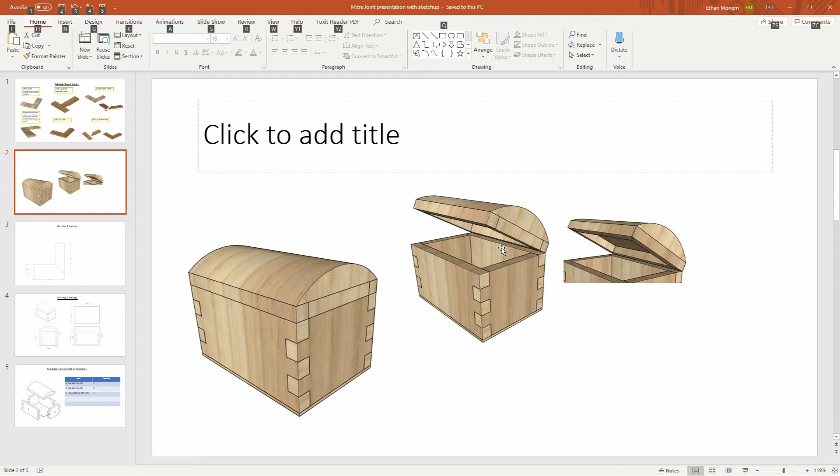I'm just going to show you some simple tricks to do that. You will then, by the end, create a working drawing and an exploded view with a bill of materials.

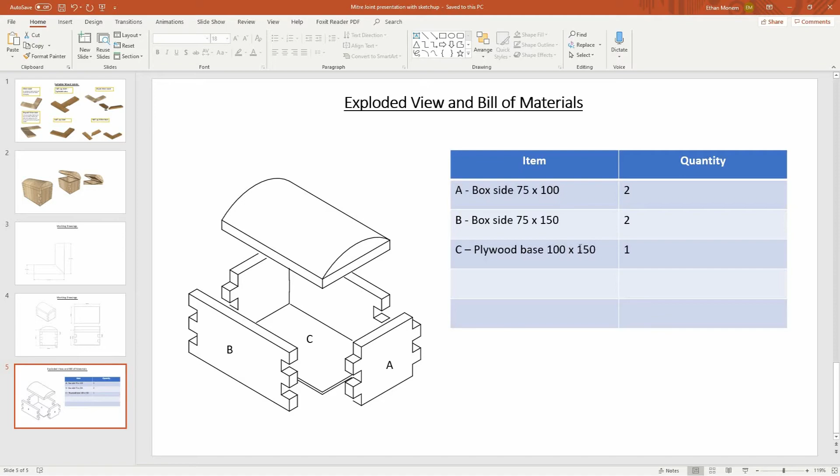You can see already I have got a part of a box that I'm making. It has got finger joints, it's got 4 walls, and what we're going to do is create the rest of this box first. The first thing we're going to do is create the side walls of our box. To draw that out, it's actually more helpful if we change our camera view so we're looking straight down.

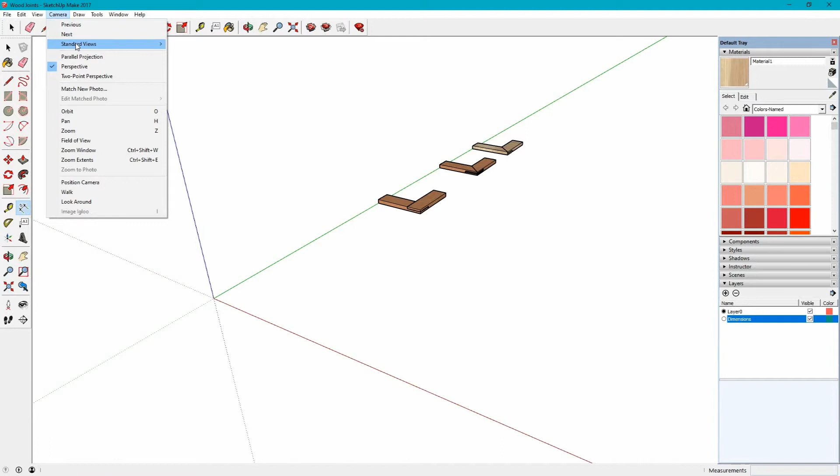The first thing I'm going to do is go to Camera, Standard Views, and click Top. Now you can see that I'm looking straight down onto the green and red axis, so our X and our Y. It might also help if we put it into parallel projection, so we haven't got any perspective going on, so we're looking straight down on top of it.

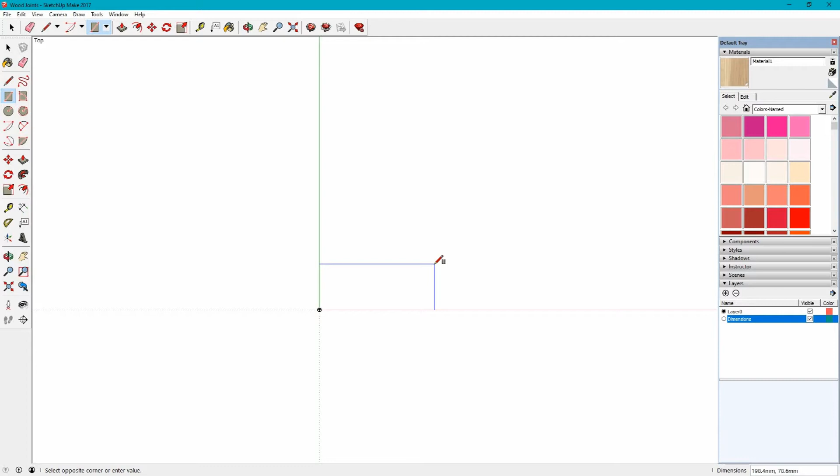Now I'm going to draw a rectangle which is 75 high by 150 wide, because that is the dimensions of our sides. I'm just going to type 150 along, comma, space, 75, as before, press enter, and there we have our rectangle, so I can look straight down onto it.

Now we're going to divide this 75 into 5 equal sections. We're going to divide it into 15mm fingers.

To do that, we're going to use this tape measure tool. I'm also going to come in the same distance as the thickness of our piece of wood. Now, the thickness of our wood is going to be 12mm, so I'm going to come along here, type 12, and make a reference point here, which is 12mm in.

Then I'm going to draw a straight line all the way across, and I'm going to measure along this line.

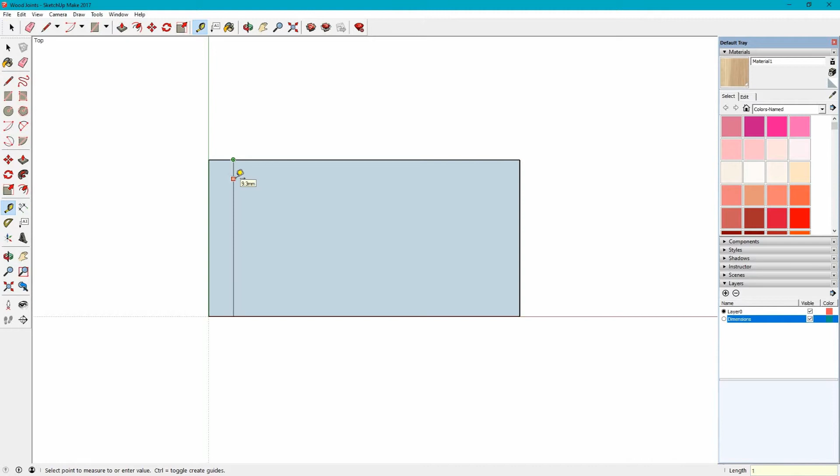Sorry, not 12, 15. 15mm, because that's the width of our finger. And then from that point I'm going to do the same, and then the same again, 15. So I'm just making a number of markers, 15mm along each point.

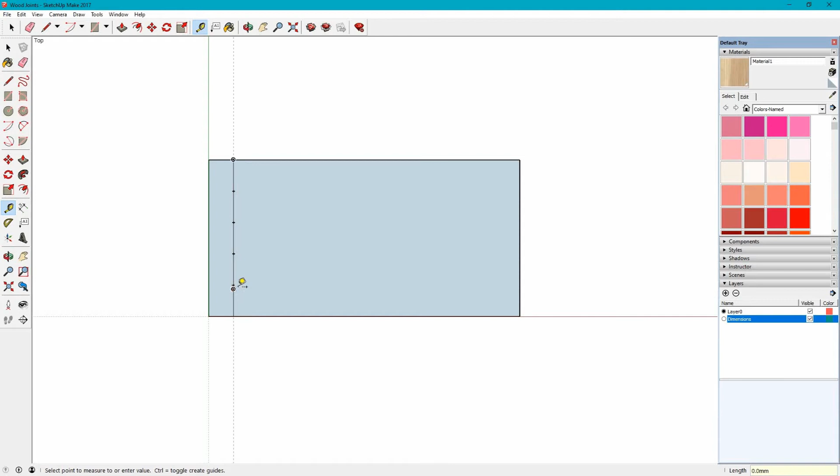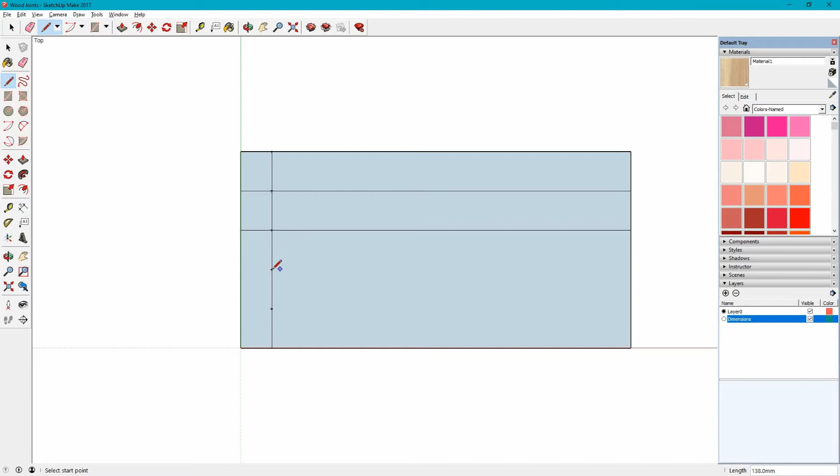Now we want a duplicate on both sides of the finger joints. So where I have marked, the easiest thing would be to draw a line all the way across to the other side, as well as to this side. I'm drawing in where these fingers will go, and then we'll delete off the extra lines afterwards. This is just a quicker way of doing this.

I also need to come in 12mm on this side and draw a straight line down from there to there.

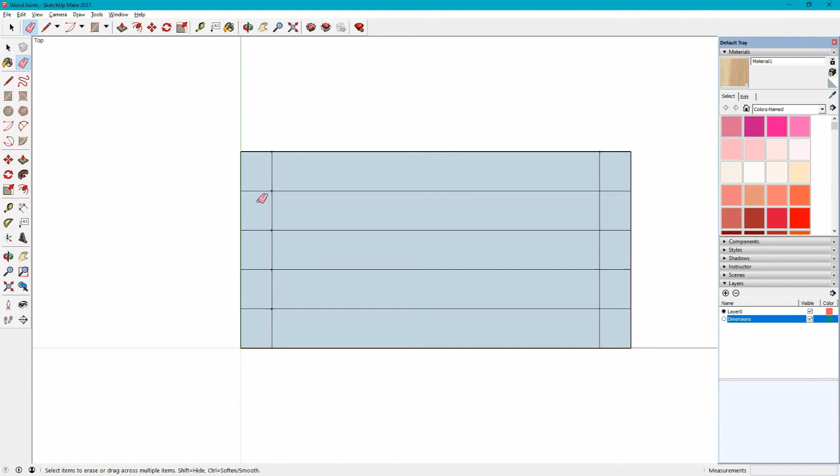What I can do now is keep the first finger and get rid of this one. So using the rubber tool, I'm just going to click and swipe across that line, and the same on that one. Do the same on this side and on this side.

Then I'm going to get rid of these middle lines. So I left click and drag, and you'll see they disappear. Then I want to get rid of these internal lines. You'll still see your guide points, but at this point it doesn't matter. Alright, and that gives us the profile of one of our side walls.

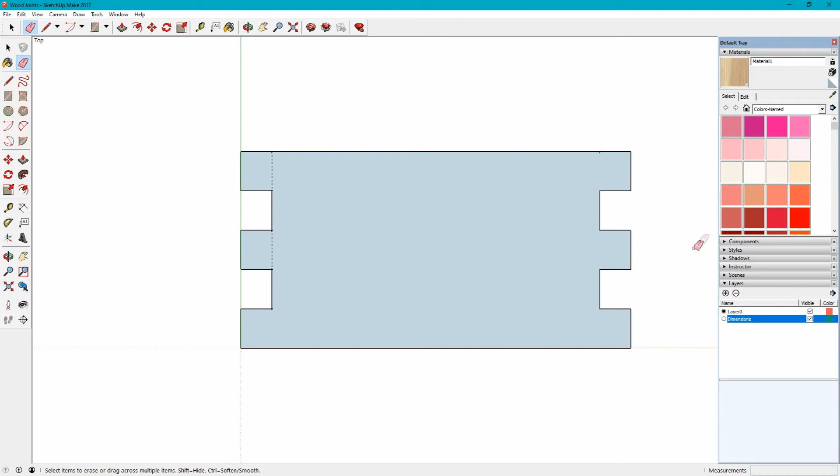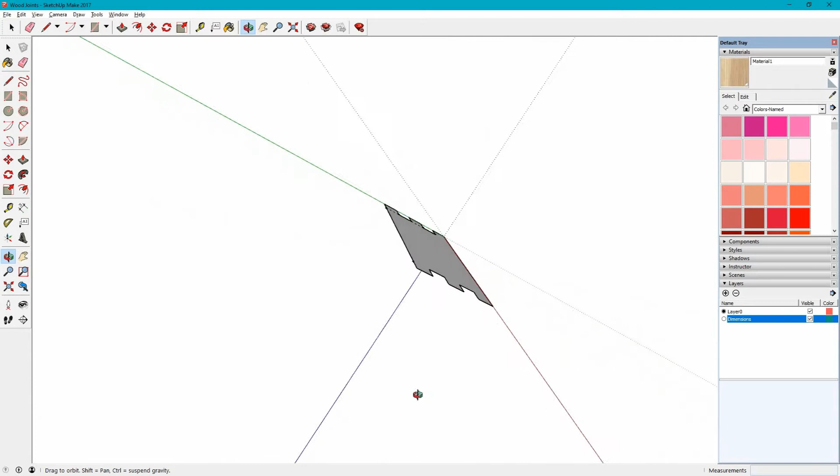Now if I click and hold the mouse wheel and rotate back into 3D. Now I'm going to set this back to perspective, so otherwise it looks distorted, and you can see there we have our sidewall. Now it's flat, so I need to extrude it, so I'm going to use the push-pull tool, hover over the surface, click and drag out, type 12 because that's the thickness, and there we have one sidewall.

Now the opposite sidewall is going to be identical.

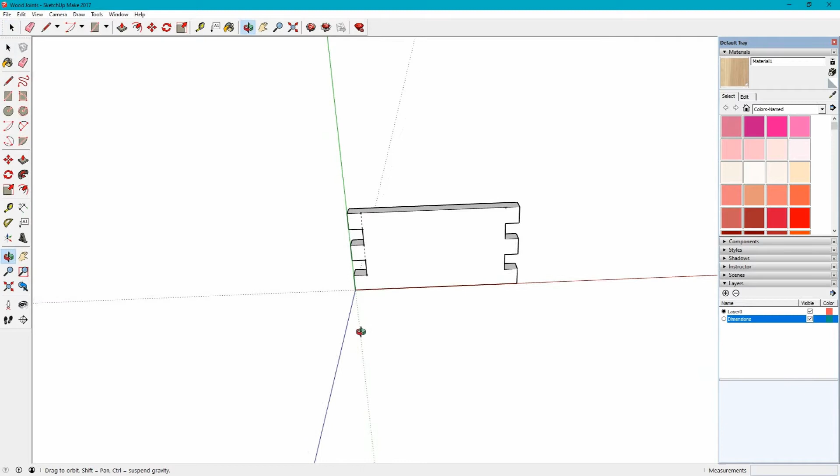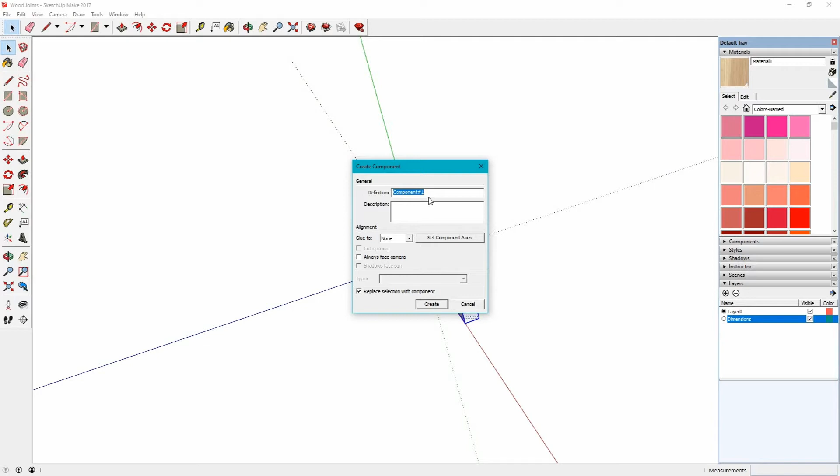So I'm going to first triple click, 1, 2, 3, right click on it. I can make it a component or a group. This time I'm going to make it a component because it is a component in the box, and I'm going to call it sidewall create.

Now, if I want to modify this, then the copy I make, so I'm going to move it and make a copy. Whatever I do to this or this, it will do the same function on all of them. So if I modify one, it modifies all of them. That's something you have to bear in mind, but because I want them to all be the same, that's what I'm going to do.

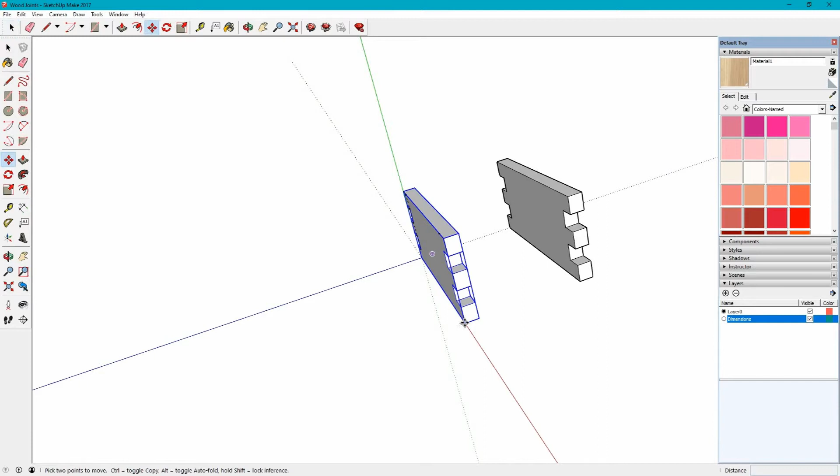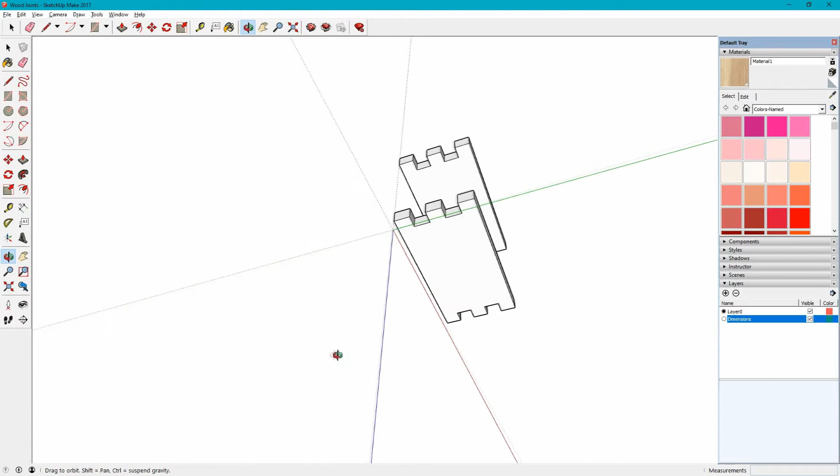Now, if you notice, if I just move this, you'll see that the guides haven't been included in the selection, which is good because we want to get rid of them. We're done with them now. Okay, so there's our two side walls.

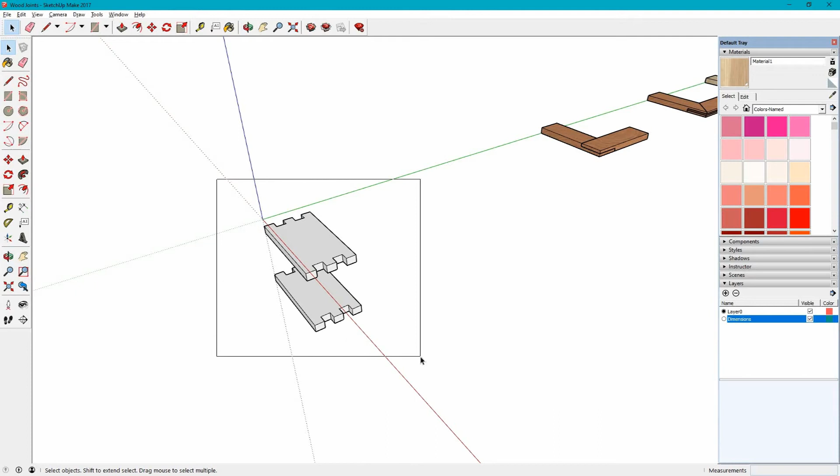Now we're going to do the same for the end. Between here to here, we're going to make our box. As you can see at the moment, I've got these going in the wrong direction. So what I'm going to do is select both of them, and then rotate about the red axis, pulling them through 90 degrees so they're in the right plane.

Okay, now what I'm going to do is move this one so that it is 100 millimeters.

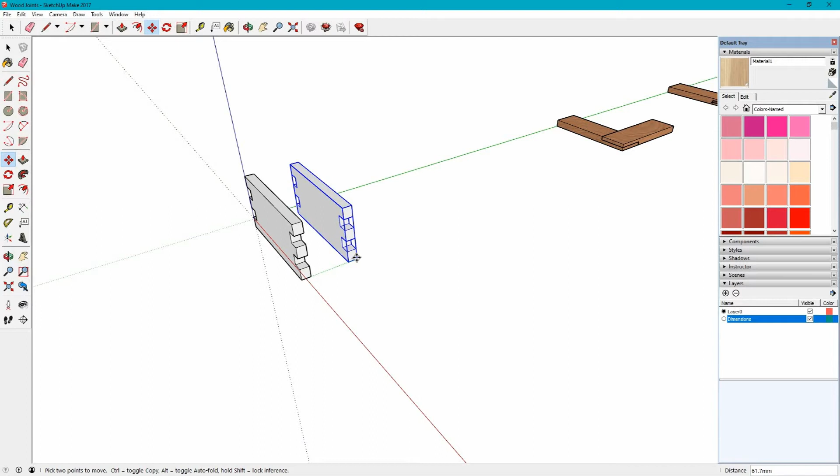I need to move it from this point, and I'm going to move that. No, it's not going to work. I'm going to do this. So I need to move it 100 millimeters minus 12 millimeters because that's the thickness of one wall. So that is 88.

Okay, which means that between here, it should give me 100 by 75, which if you look in the dimensions panel, it does. So that is correct.

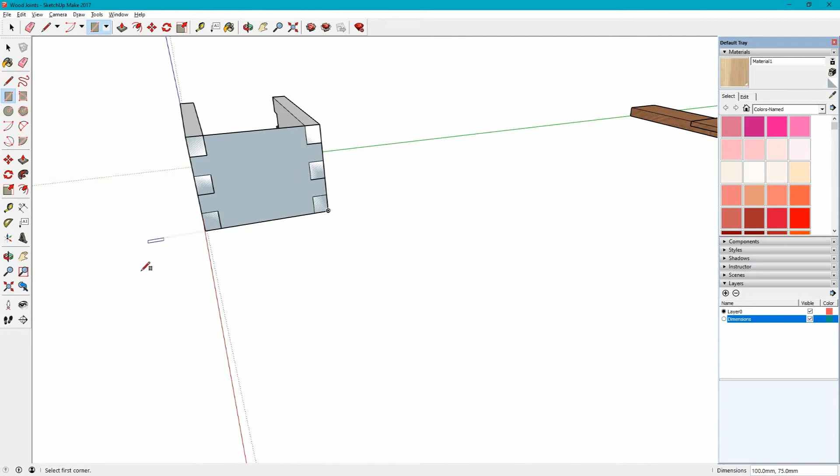Okay, so I'm just going to draw that over the ends. I've got it the right distance apart. Now I can use these to create guides, so I don't need to draw in guide points. I can actually see where things should go. So if I draw that in there.

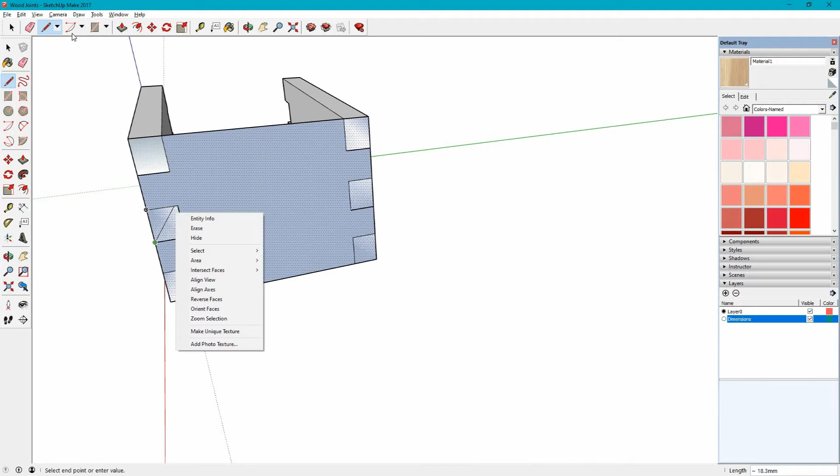And you'll see it starts to block out certain parts. Okay, so just drawing in the fingers on the end.

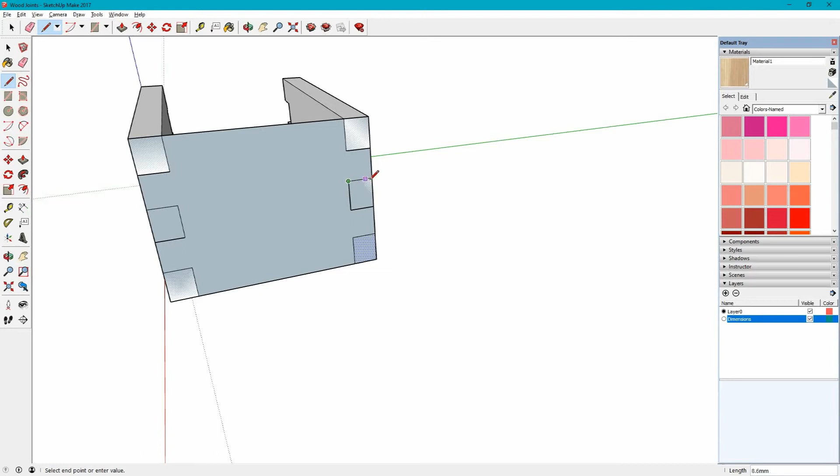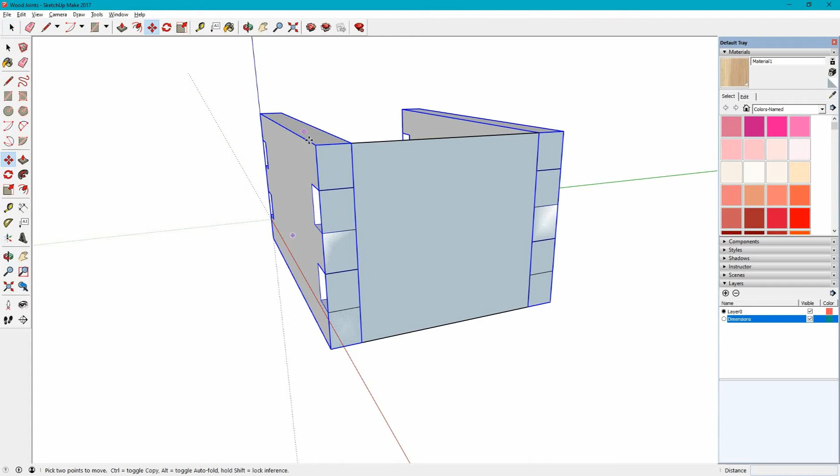Okay, now we've got that drawn out. What I'm going to do is click and select one of these side walls, hold Control and select that one, so I've selected both. I'm going to drag them out of the way just for a moment, just so we can see that we've done that correctly. Now again, I'm going to take the eraser tool, and this time erase off the ends, the middle bit.

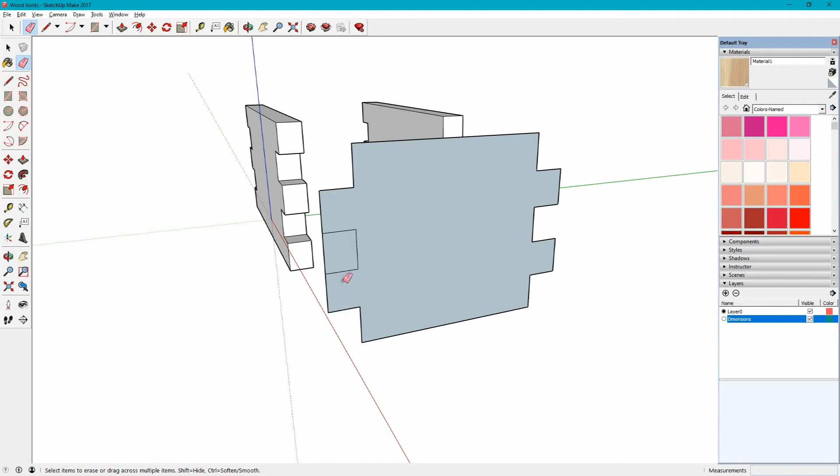Remember, just left click, hold it, drag across the line, and it will delete. So that's the shape we want to extrude. Okay, again, we're going to pull that. It's 12 millimeters thick, so I just type 12 to extrude it.

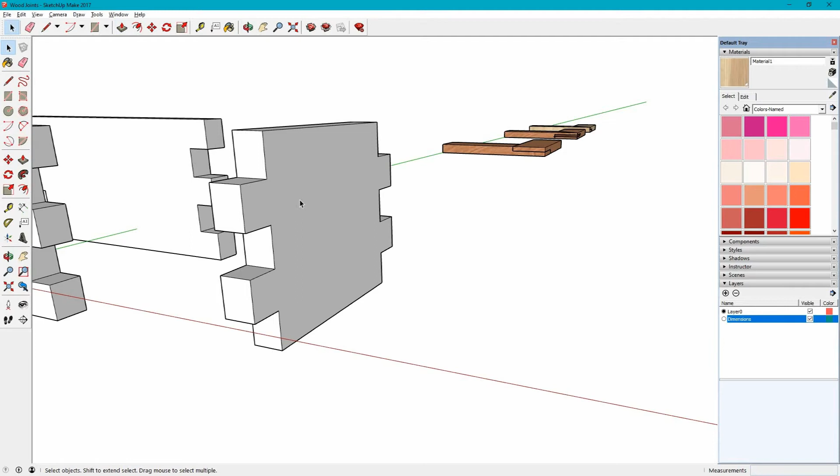Okay, triple click, right click on there, make component. So we'll call that end wall. Click create. Okay, and there we have our end wall.

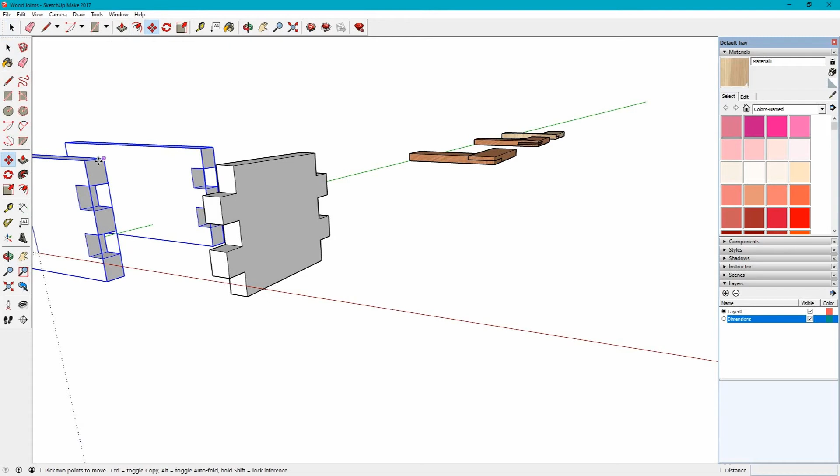Now if I zoom out a bit, I'm going to reselect these two. Click once, Ctrl, select that one, and I can click on that point, move it back, and I can actually line it so it locks in.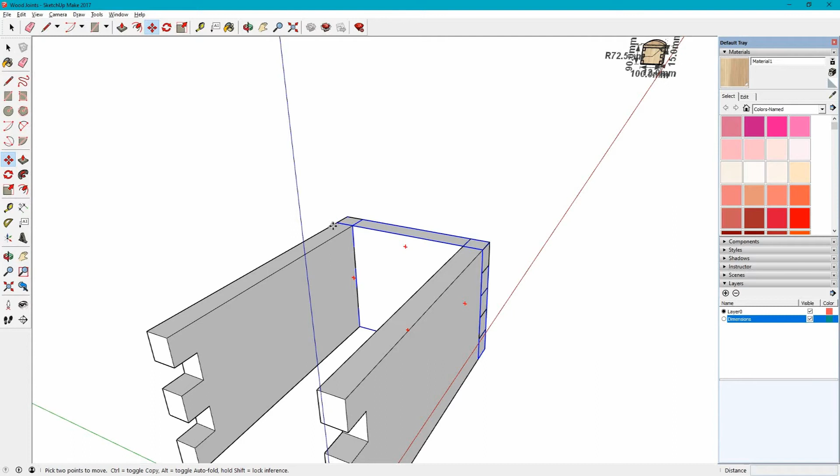Okay, the next thing to do is simply to select the end wall, and we're going to make a copy. So I'm going to click on this edge, press Control, and you'll see it makes a copy. Drag it to the end, lock to that point, and there we have the side walls of our box.

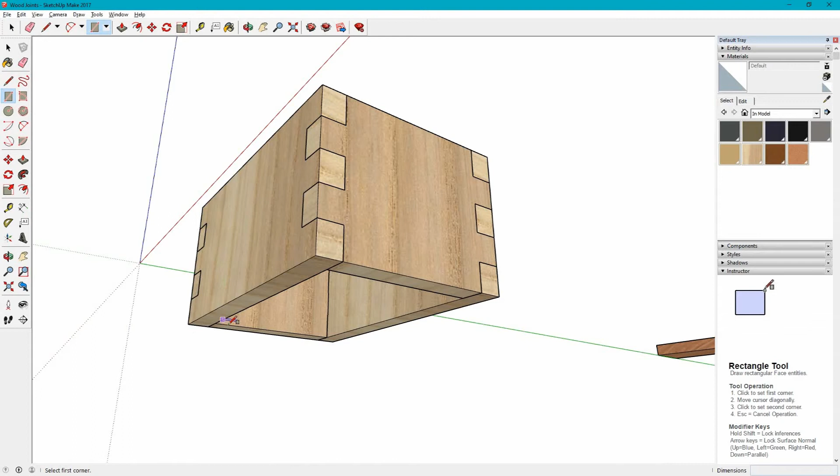Now the first thing we're going to do is put a base on the bottom. You need to think in terms of the materials and components that you would have available to you in a workshop when you're designing. So for the bottom, I would probably put a piece of plywood. I'm going to draw a rectangle that covers the whole bottom surface, and then pull that down. The plywood, let's say it's 3 millimeters, so I'm going to make that 3 millimeters.

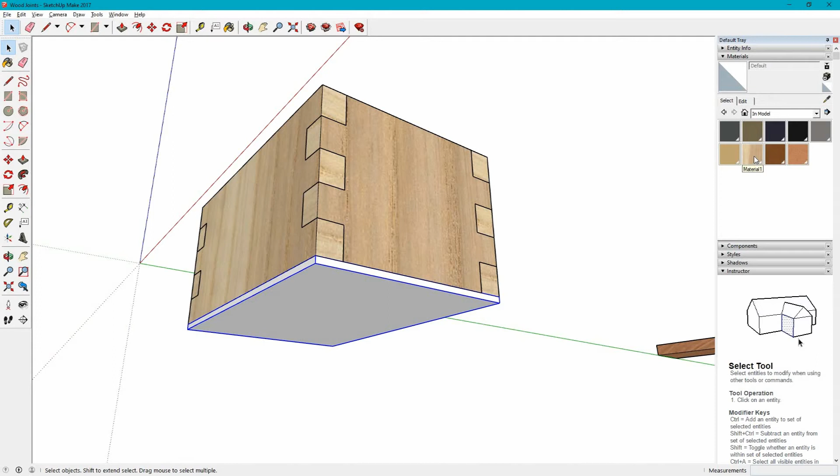Okay, group it, and then now I've already created a material which is wooden, or you can create a plywood material if you want to. Okay, and then apply that. Okay, so that's going to be our base. It's a piece of plywood that goes on the bottom.

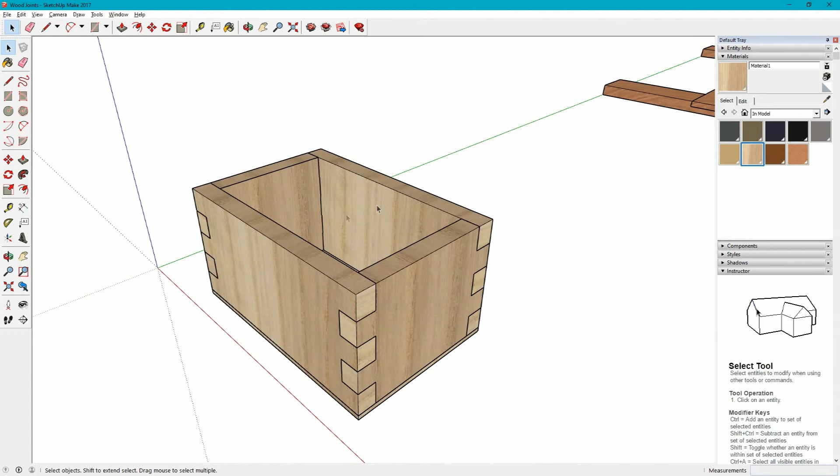The top, we're going to make a nice curved lid so it looks a little bit like a treasure chest, and then we'll drop in a divider in the middle here. Okay, so again, you need to think about the processes, and this is how we develop products to make things go forward. When you're doing this for your NEA, you will need to take screenshots as you go, and each time you take a screenshot, get rid of the axes just so you've got the model to show your thinking and how you're changing things and adapting.

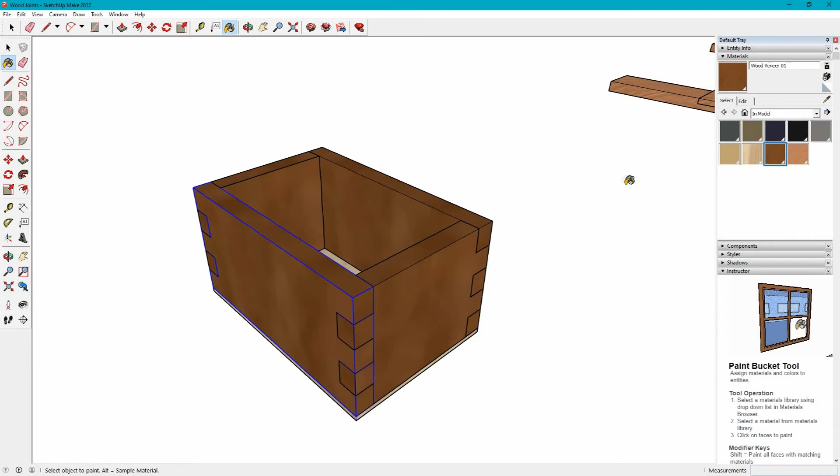See, the beauty of Google SketchUp is I could try out different types of wood just to see what it looks like, screen print it, put it onto my PowerPoint, get some feedback from a user or a client. Okay, so you can try out different things. What we want to see in your PowerPoint is your thinking. So you have to take lots of screenshots, lots of photos of what you're doing, present them on a page.

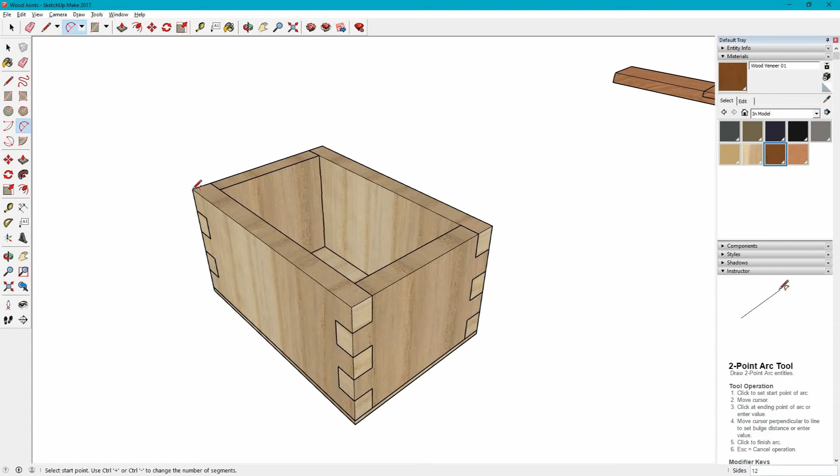Okay, so for the top, we're going to make a curved lid. So if I come to the end here and I draw in an arc, so I'm using the arc tool. Now I want it on the blue axis because we're going straight up. I'm going to hold down Shift so it locks to that axis.

Okay, what I'm thinking of is I'm going to sand a piece of wood into an arc shape. Now the pieces of wood that we have are 20 millimeters thick, so I'm going to make that, oops, I've changed axis here. I'm going to make that 20 millimeters thick. Just make sure you're on the right axis when you do that. So I type 20, press enter, and there I have my arc shape.

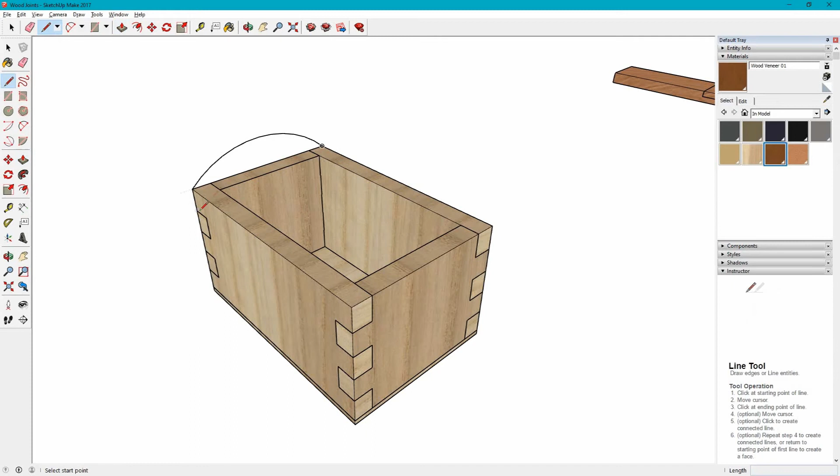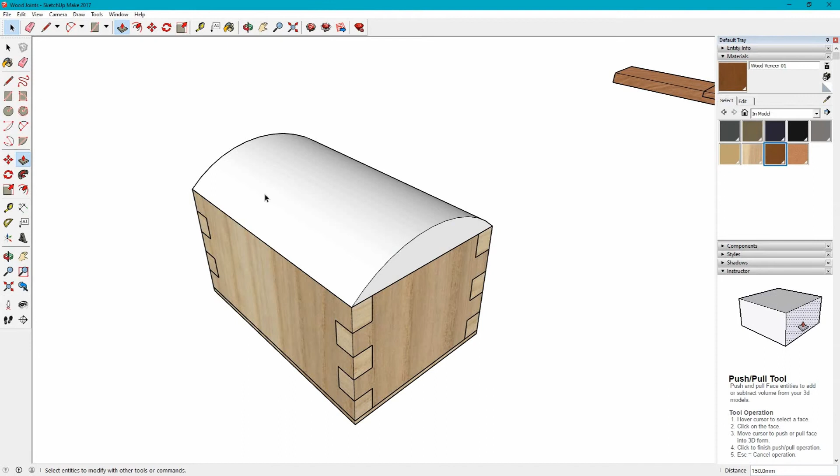Okay, then I'm going to pull that. Can't yet because it's not a closed face, so all I've done is drawn an arc. So I need to draw in a straight line to join the arc to make a closed face. Okay, now I have made a closed surface. You can see that it is dotted. I can use the push-pull tool and pull it all the way across to the other side, to that point. I'm going to make it a group.

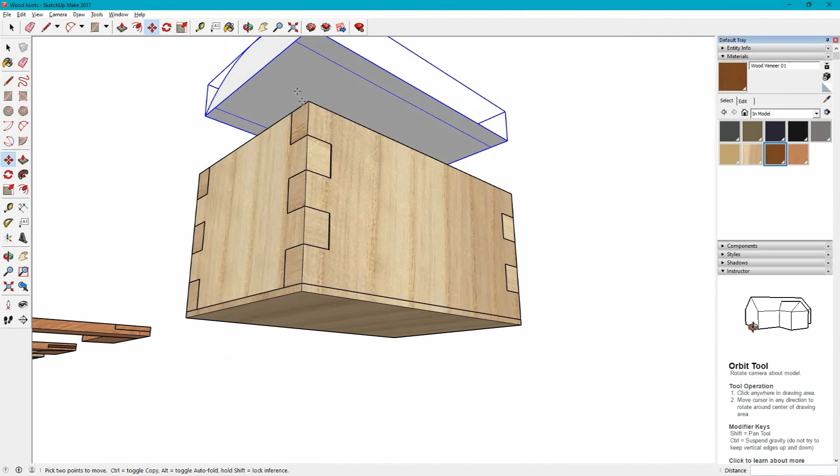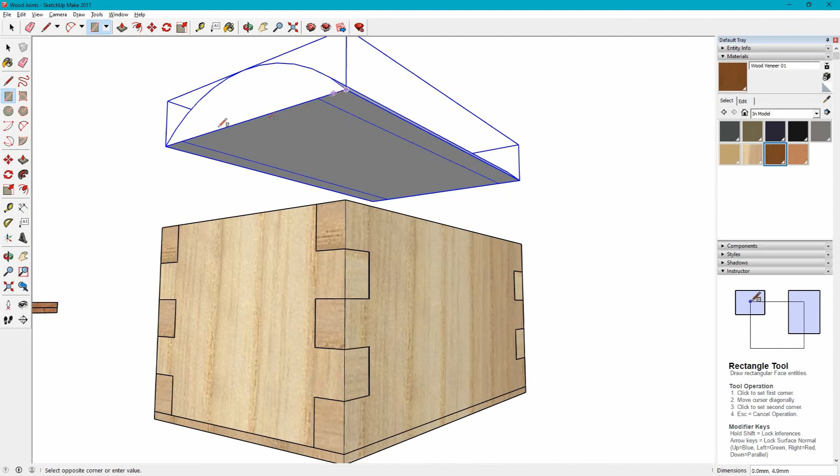Okay, now if I wanted to hinge this as a hinged lid, there's nothing really to connect a hinge to. So what we're going to need is to create some sort of framework to sit underneath here. Okay. So the easiest thing would be to draw in from that corner to this corner along the face here. Now we're going to use 12mm, the same wood we're using for this, so it's 12mm thick. So we draw a 12mm by 150 up, as you can see, which I have already drawn on the bottom there.

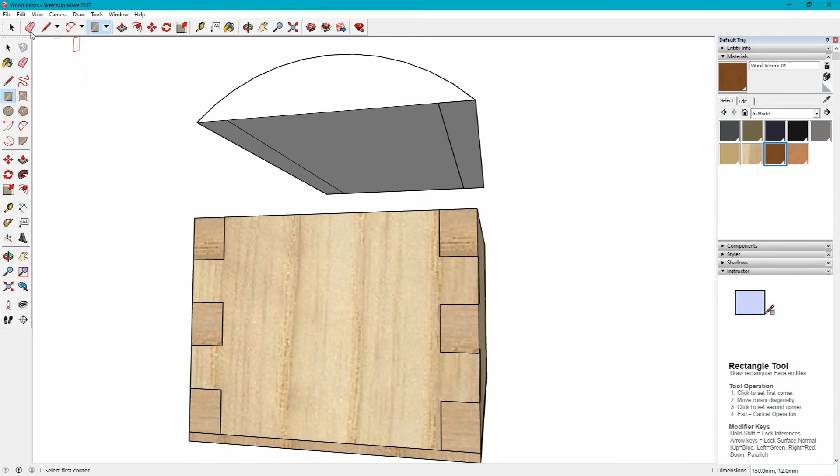Now I'm going to put it as part... do you know, I won't. I'll put them as separate. So I'm going to make these separate components because they are effectively separate pieces of wood. Okay, so I'm going to draw one in there, pull that down. Let's go 12mm down.

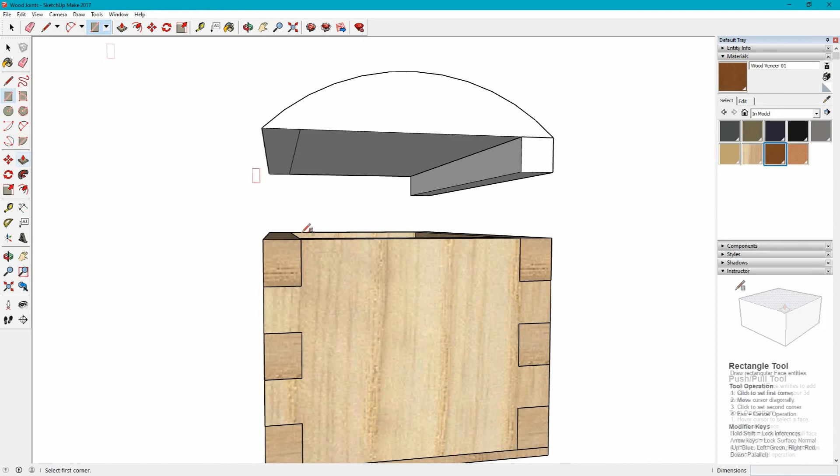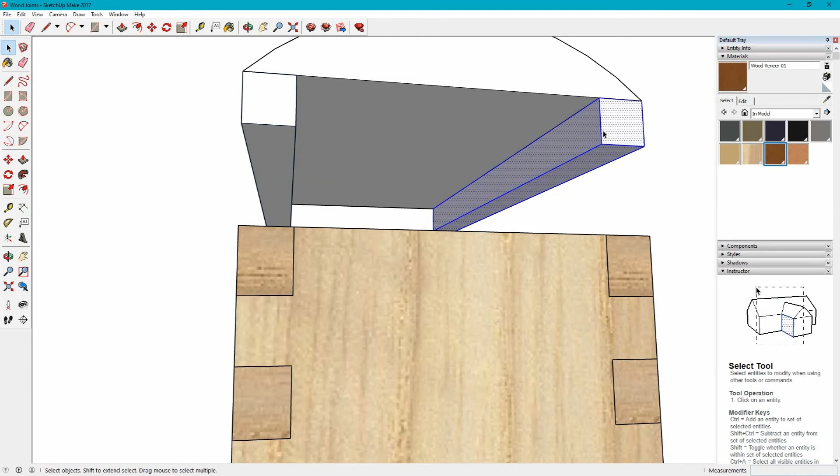Okay, I'm going to do the same on this side. So draw in 150 by 12. Pull that down. Let's just group those. I'm going to make that a group. Make that a group. Then, so here's a way you can try and test your ideas.

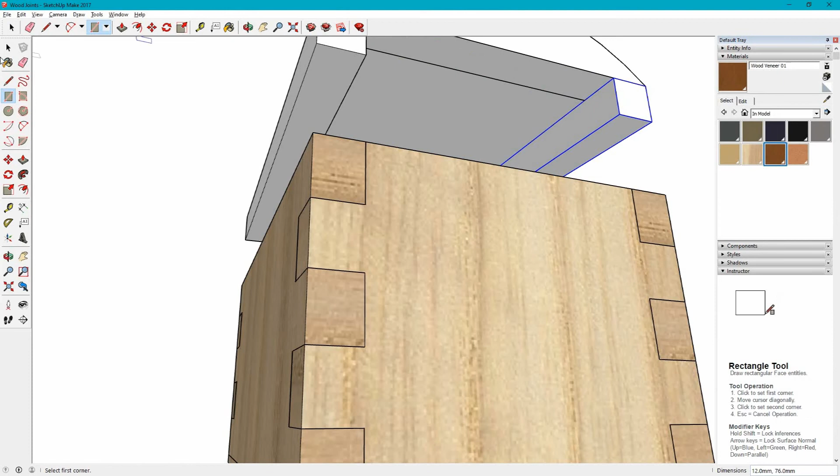So I could draw in the end so that it's along that edge. So that's 76 long by however wide, so we said 12mm in. Okay, so that's 76 by 12. Pull that down so it matches that side. Do the same on this side.

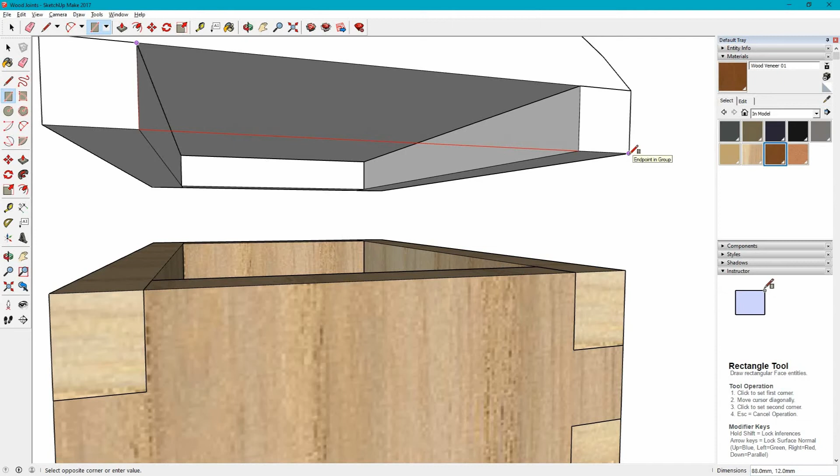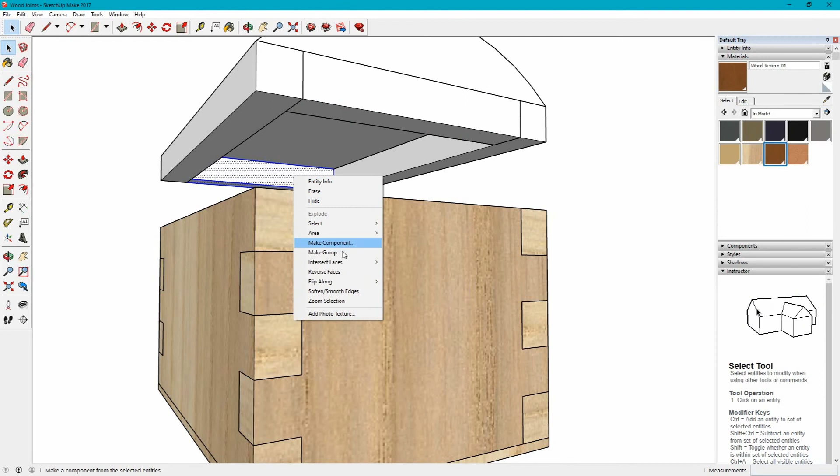Okay, so that's 12mm there. Pull this down. Again, don't forget you want to group your components. Okay, now I want to move the whole lid, but because they're separate components, what I'm going to do is select all of those components and group those together. So now I've got a complete lid.

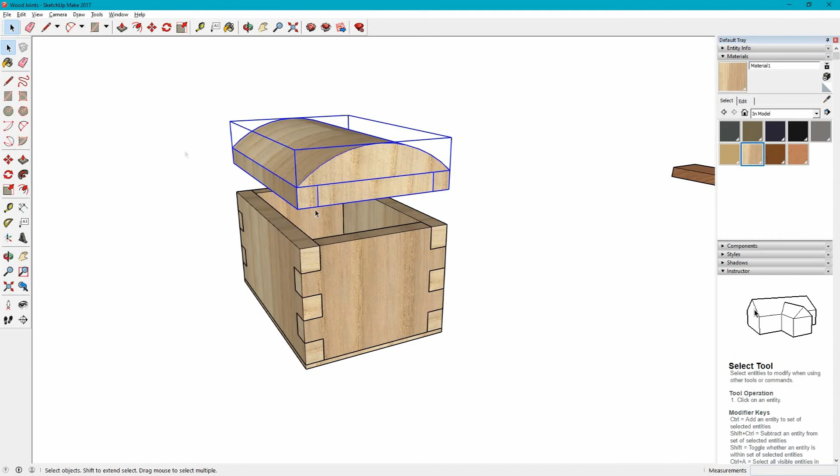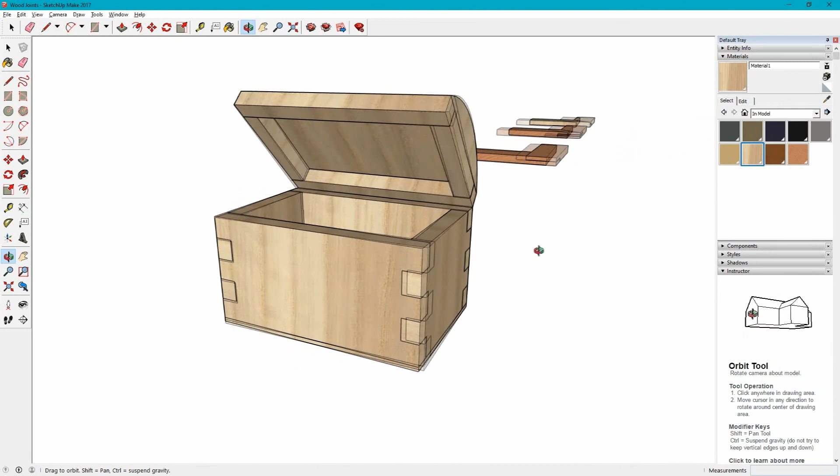Okay, I'm going to apply a finish to it. So there's my lid. When I want to move it, I can move the whole thing. If I wanted to show how it hinged, I could actually rotate on that point, because it's going to rotate about that point, so I could show the lid opening and closing. Okay, I'm just going to undo that.

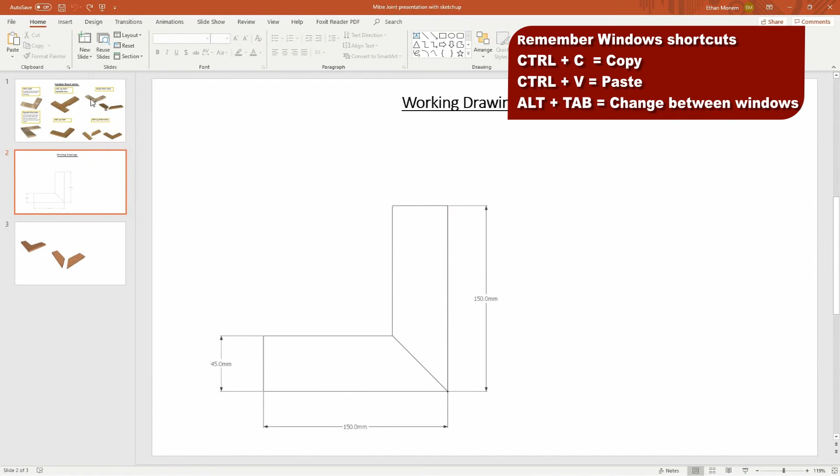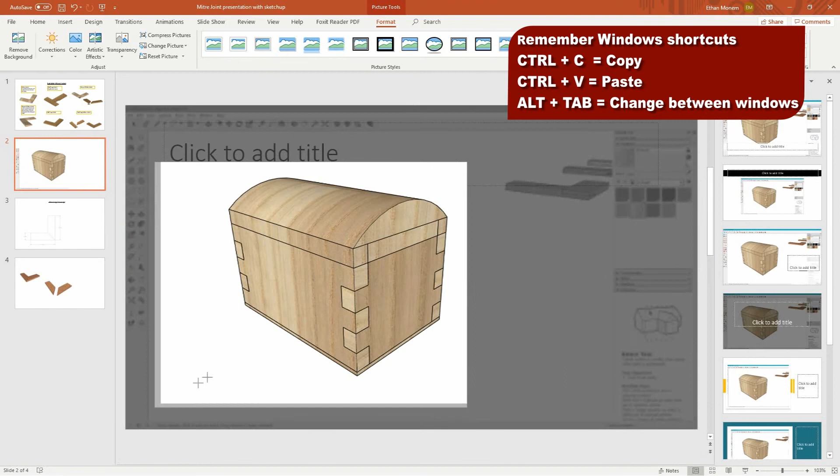Now, if I were presenting this on my PowerPoint, I'd get rid of the axes as I've shown you before, so I've unticked the axes on there. Print screen it. Put it onto a new slide on my PowerPoint. Okay, double click, crop off the bits we don't want. And then again, if you set transparent colour, you can get rid of the white on there.

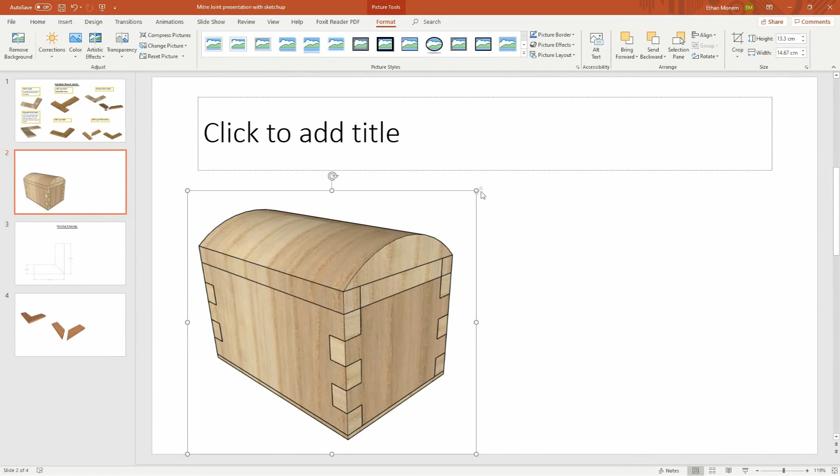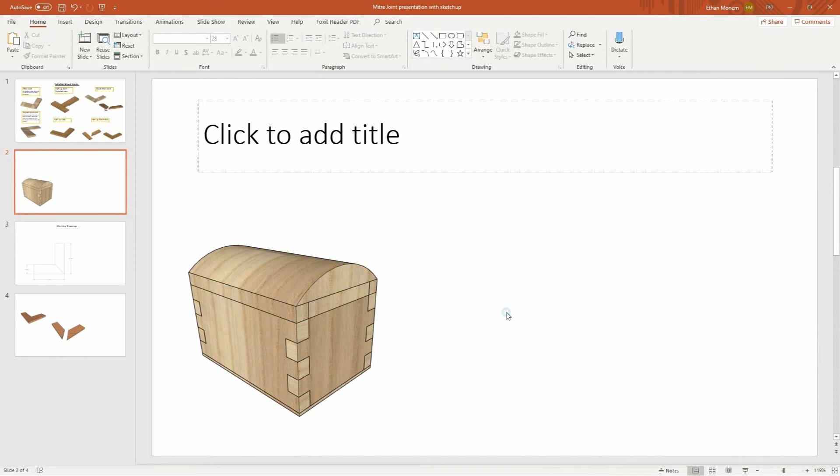Okay, then I could annotate to show that this is how the lid is going to be. I could also take a picture of it with it open. Do the same thing. Remember, to quickly transfer between one program and another, if you Alt-Tab, you bring up all the different programs that are open, and then you can very quickly transfer between them.

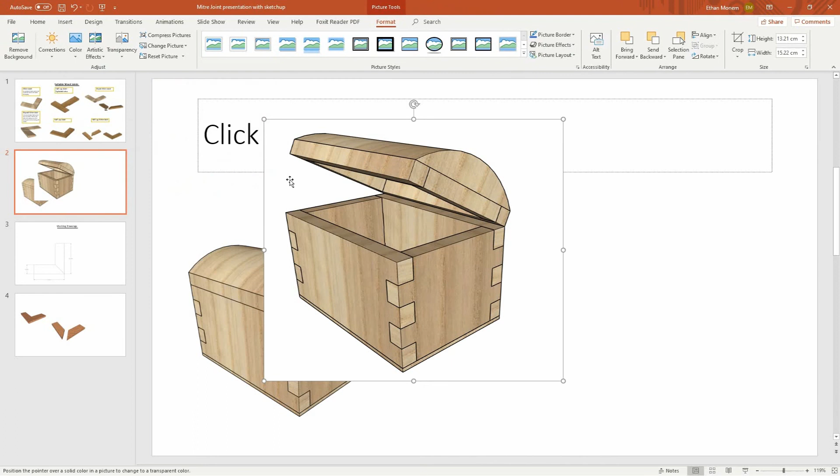Okay, do the same thing. The thing is to practice. Once you get quick, you'll see that you can create very good slides very quickly. Okay, I can go and tidy that up later.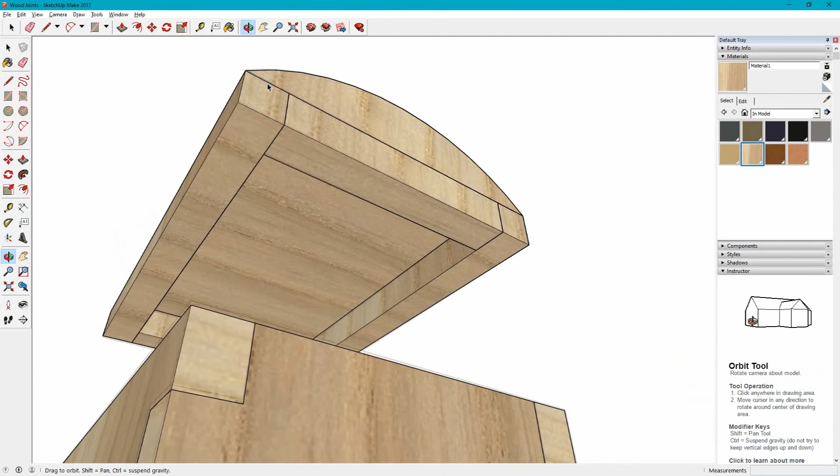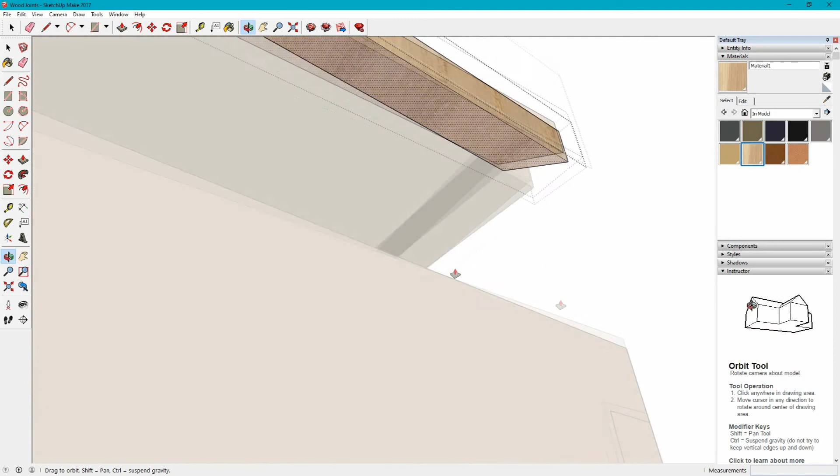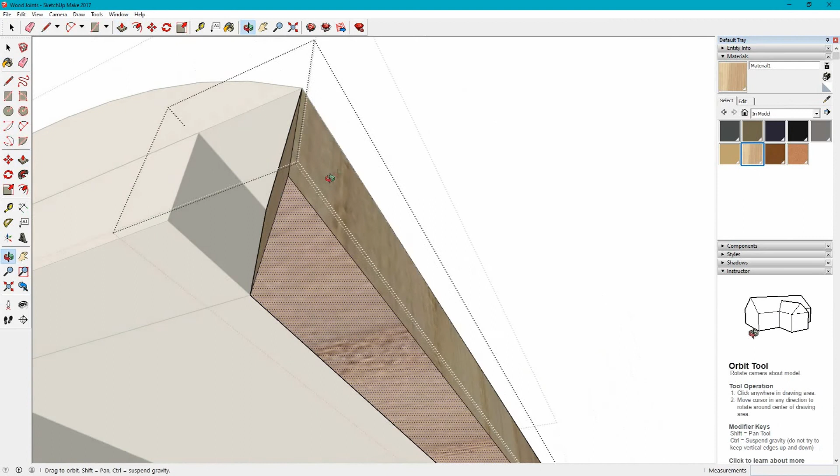So I need to double click to edit this group, and then I have to double click to edit that component. And I'm just going to draw a line across, and then I'm going to push that up until it comes off, so that I have a mitre on that end. I'm going to do the same on this end. So from that point on the other side piece, I'm going to push that until that disappears, so now I've got a mitred section there.

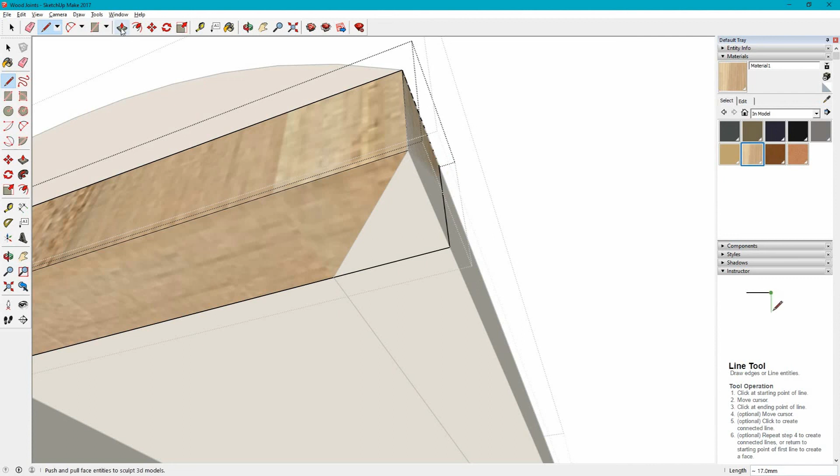Now if I edit this one, I pretty much can do the same thing. So I'll drag this out until it matches that point. Draw a line across here. Can't really see the line because it's hidden by that component, but you'll see I can hover over that corner, drag that down, and now we've got a mitred edge to it. Okay, I'm just going to delete off that side. Do the same to this piece.

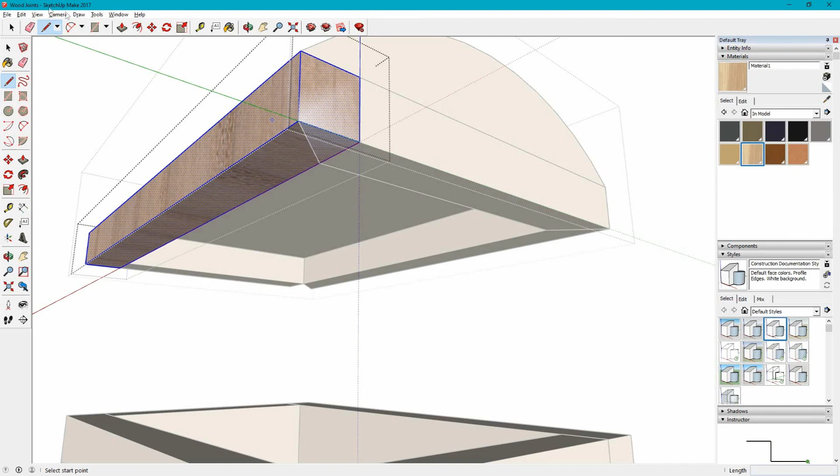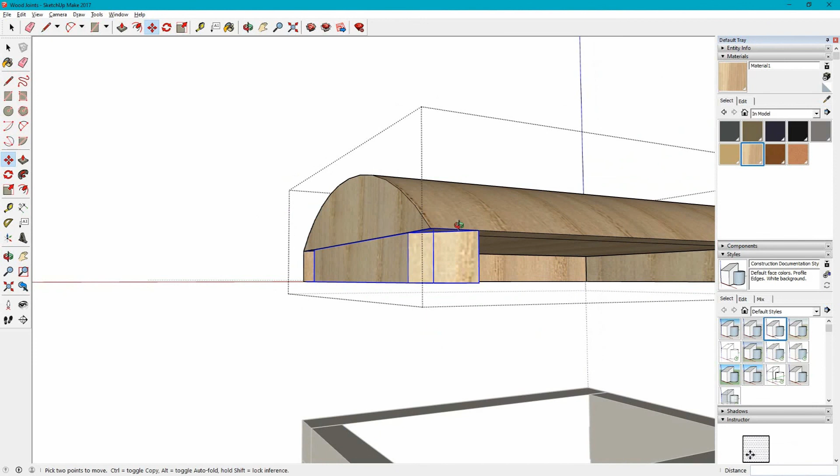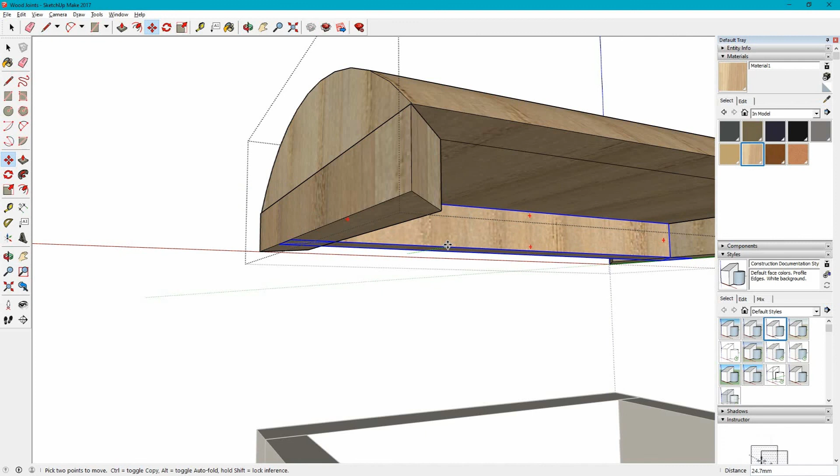Now if you're feeling lazy, I'll show you a quick way. We can just delete that component and that one, and we can just make a copy of the ones we've just done. Press Control. Okay, we will need to rotate them 180 degrees. Lock that one into place. Do the same for this one. 180 degrees, and then move it into place.

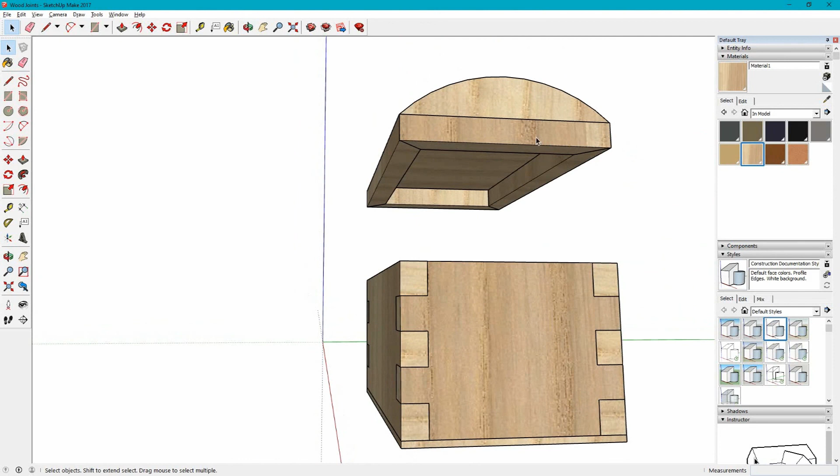Okay, now the difference is you can't see the ends because we have a mitre joint on there. Same as before, bring that down. Maybe you want to show another view of it, again with the lid open, so you can show your client what that would look like with mitre joints.

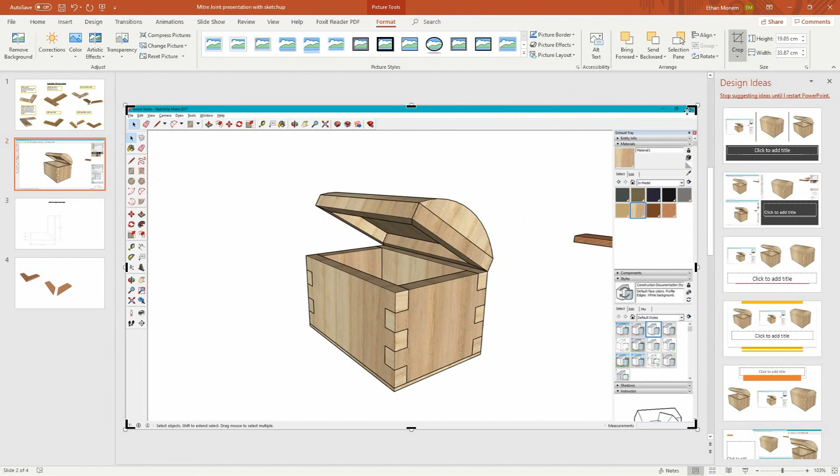Let's print screen that. Let's go to our PowerPoint, paste it. Going to crop that out. Okay, to make that transparent. Now we might just want to show this corner, so if I double click that again, maybe I'll just crop that down so it's just the lid, so it takes up less space, and then you could show alternatives and annotate your drawings.

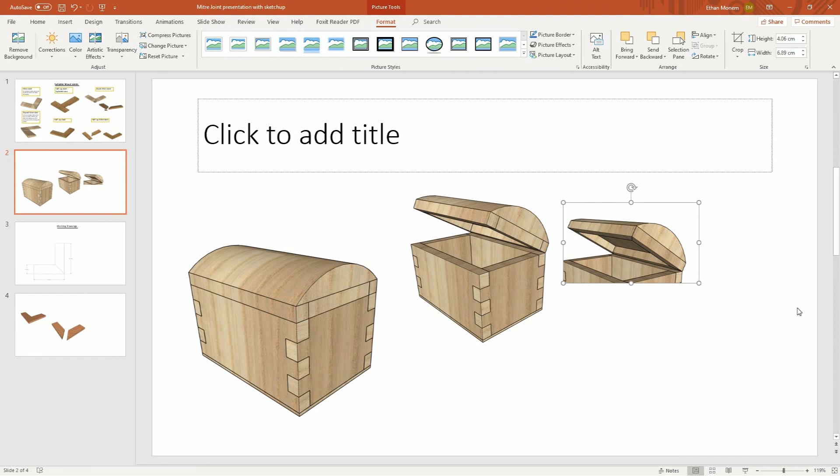Okay, so you can see very quickly and easily we can create the full model. It's really important though at this point that you're thinking through the component pieces that are going to go together, because if you can do that at this stage, it makes making it so much easier.